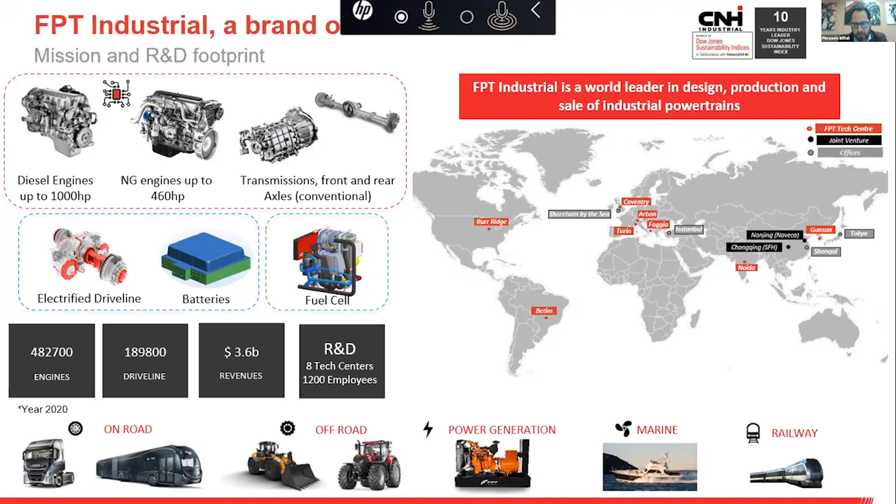So why electrification? For the on-road segment, electrification is a must to achieve zero emission, lowering CO2 to comply with the tightening legislation framework coming with Euro 6, Euro 7, and worldwide certification regulation. For the agricultural segment, we see more room to use electrification as an enabler to electrically assist the machine, the engine, to improve overall machine productivity and fuel economy.

Our concept of hybrid tractors consists of a downsized combustion engine, multi-fuel, so the engine can run either on diesel or natural gas, with an integrated electrified machine coupled with the compact engine, to replace the original conventional unit on the machine. This also can bring simplification of the after-treatment, and coupled with electrification of auxiliaries and implements, can offer great benefit in terms of fuel economy.

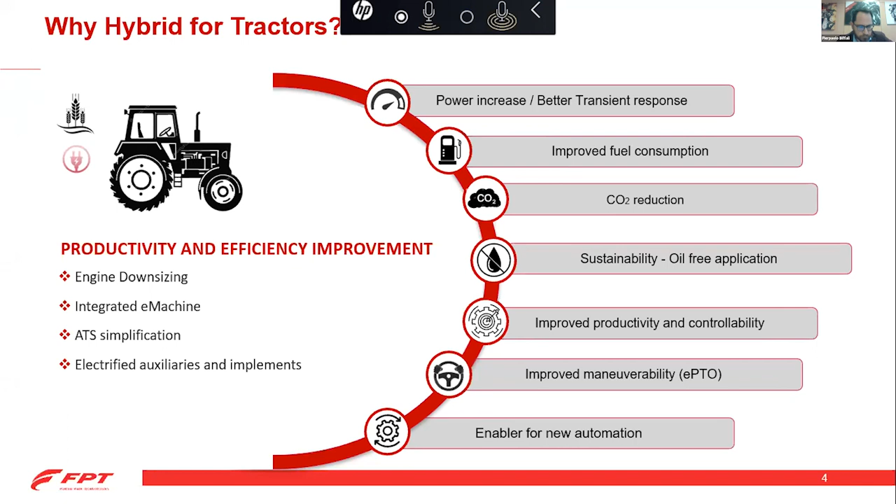The heart of the tractor, of the hybrid solution, is our F28 hybrid. It's a 4-cylinder inline newborn engine, 2.8 liter displacement, coupled with an integrated motor generator on the flywheel side, conceived to be scalable. That means operating at 48 volts for a mild hybrid architecture, but with the same compact layout, scalable to a high voltage solution, offering zero emission operation opportunity and very low noise output when the electrical mode is activated.

The F28 engine can run either on diesel or methane or biomethane for agricultural application. We can also leverage a simplified after treatment architecture, saving the SCR. That means no urea, reduced complexity of the after treatment, and improved reliability of the system on the field.

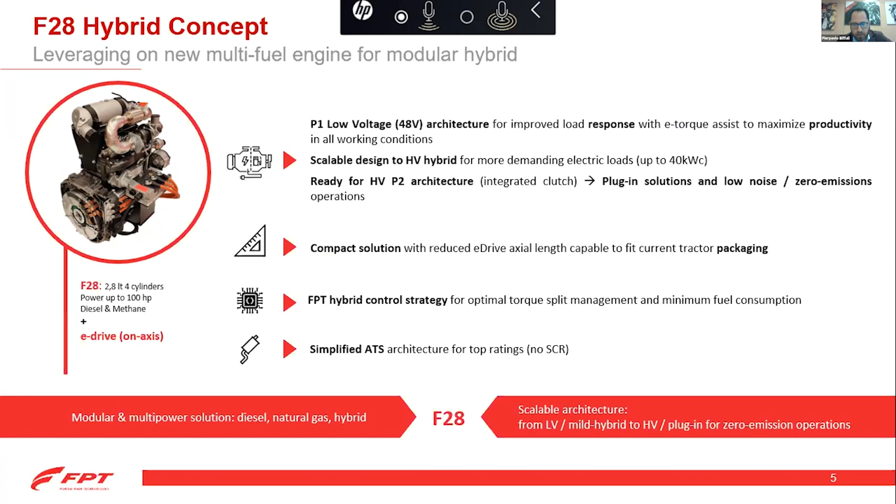What maturity have we achieved, where are we today? We have already run testing on the powertrain test bench with the hybrid unit, reproducing several duty cycles and mission operations of the tractor, confirming the performance increase and the big step in fuel economy when this hybrid machine is coupled with 48 volt electrified implements like a leaf stripper, disc harrow, or sprayer pumps, which can provide very efficient operation compared to current mechanical and hydraulic implements.

We have planned next year, in 2022, to run field trials on a small fleet of tractors for this 48 volt arrangement, and we will go ahead with the high voltage solution first on the test bench and on the dyno, and then the following year on the field.

The main challenges behind concrete application of such technology in tractors are two. One, as you can imagine, is still the high cost of hybridization and electrification of the tractor, which is slowing down the introduction of electrified solutions in agriculture. But this can be partially or even totally compensated and recovered by improved features, starting from fuel economy and fuel expense that such an arrangement can offer.

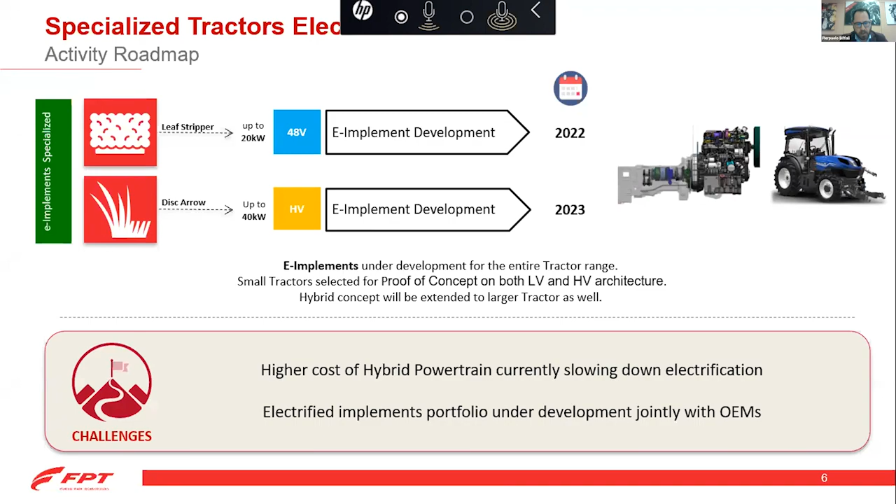And I'm done, Julian. Thank you very much.

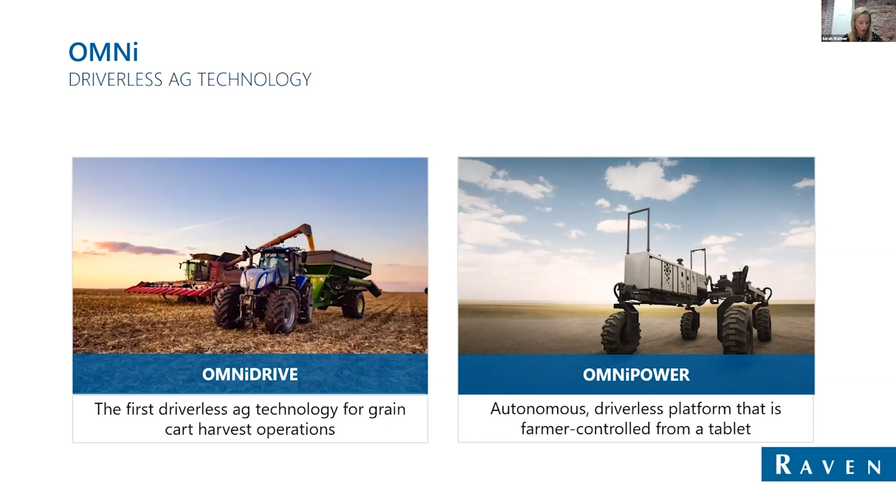The next one I want to touch on briefly, because I want to make sure people understand from our perspective, is connected workflow. As we push towards more automated or autonomous solutions, the connectivity of what job needs to be done and what data that machine is picking up as it goes through the field becomes incredibly important. Even today, where for the vast majority everything's manned, as work gets more complicated, as farms get larger, the coordination of machines, people, and activity, and the understanding of what happened in that field for your own planning purposes and for regulatory purposes, all of that becomes more and more critical.

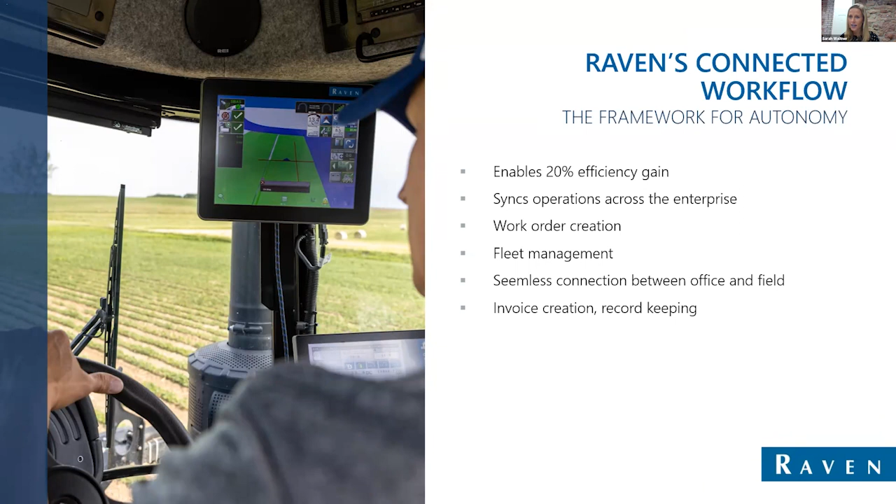As part of our solution set, we have what's called connected workflow. It's all about making sure that the work and the jobs you send to the field are the correct ones, that in large fleets you understand where your fleet is, how you can maximize the usage of your fleet, your people, your material, and then making sure you're getting all of that back from the field for further decisions, invoicing if appropriate, regulatory needs, and other things. That to us is a key piece as we look towards automation and autonomy, because you have to have that connection via data and information on what is going on there.

My encouragement, just to wrap up here: ag continues to be changing, technology continues to get more complicated, farming professionals already work tremendously hard, and for us to continue to feed the world, we need to continue to insert technology where it makes sense. My challenge to people would be to think about what the future of automation and/or autonomy looks like in your operation, and what things you should be thinking about now and planning for over the next 1, 3, and 5 years.

I think the gentleman who shared on the evolution of engines did a great job. It's not all going to come at once, same size, same thing for everybody. This is going to come in some markets and use cases faster than others, but I think it will come in some way for everyone. So being ready for that, given all the changing dynamics we see in front of us, will be really important. Thank you.

Come on, there we go. Hello, Sarah, that was great. That OmniPower thing is fantastic looking, it looks like something that should be on Mars, right?

It's really exciting, fun to watch in motion too. I imagine it's quite cool, just trundling around by itself. Is there any link between autonomous and artificial intelligence? It seems like the two things would go hand in hand.

First, with a proven diesel engine, almost all drive-related challenges in agriculture could be solved. Thanks to high torques and low speeds, the units also run very economically, and the fuel tanks are big enough for longer working days.

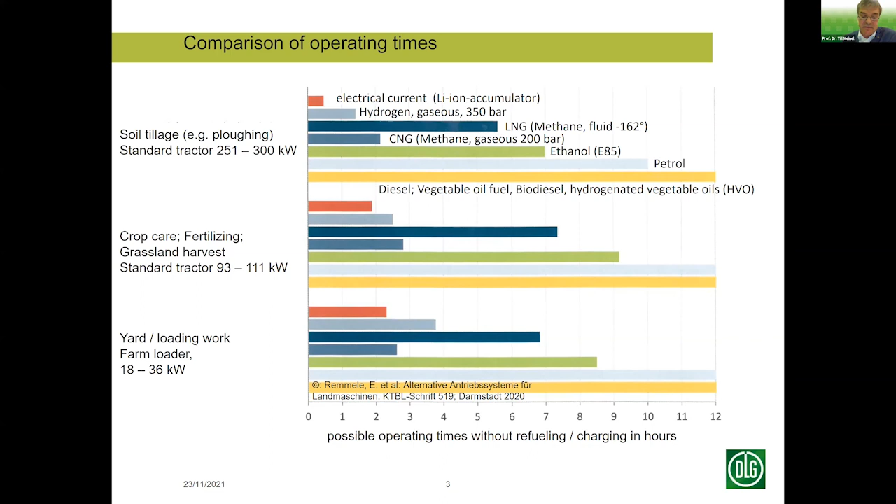In the heavy truck business, three concepts are in the foreground of discussion at the moment: battery electric drives, combustion engines for gaseous fuels, and fuel cell drives. Some of those concepts are already realized for ag machines, and have been in the market for many years.

Here we see an example for a battery electric driven implement. Farm loaders, for instance from the company Weidemann, are sold since 2015, followed by other companies, for instance Schaeffer, and also the e-truck from Silo King.

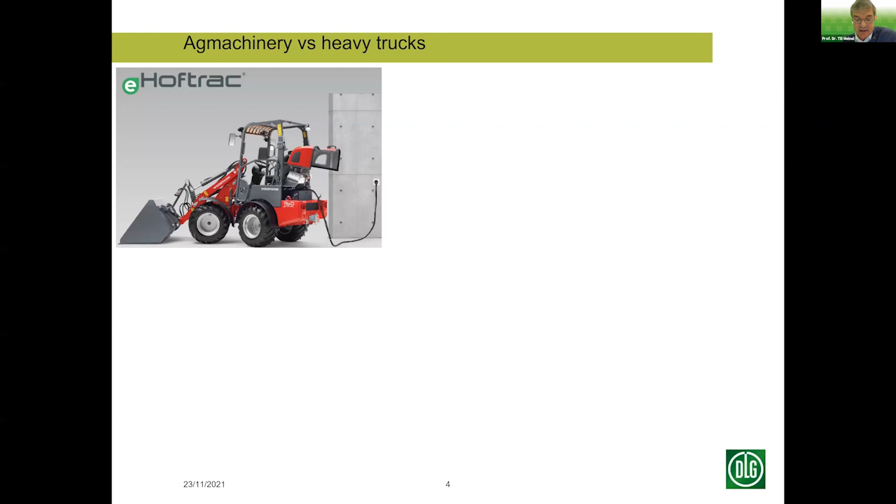The second concept is combustion engines for gaseous fuels. Here, New Holland with this T6 180 methane is starting right now the series production — this is an engine for CNG. We also have other examples, for instance the dual fuel motor for diesel and CNG from Valtra, and also FPT, as we heard earlier today, will come with such a product.

The third concept is combustion engines for hydrogen. Here, JCB with the backhoe loader with hydrogen-powered combustion engines is shown, and also Deutz is planning a series production of a 7.8 liter hydrogen motor in 2024. But these motors are not for applications in mobile machines so far.

Fuel cell drives are not realistic for ag machines at the moment. There are some research projects going on, but that will not be brought to the market within short term.

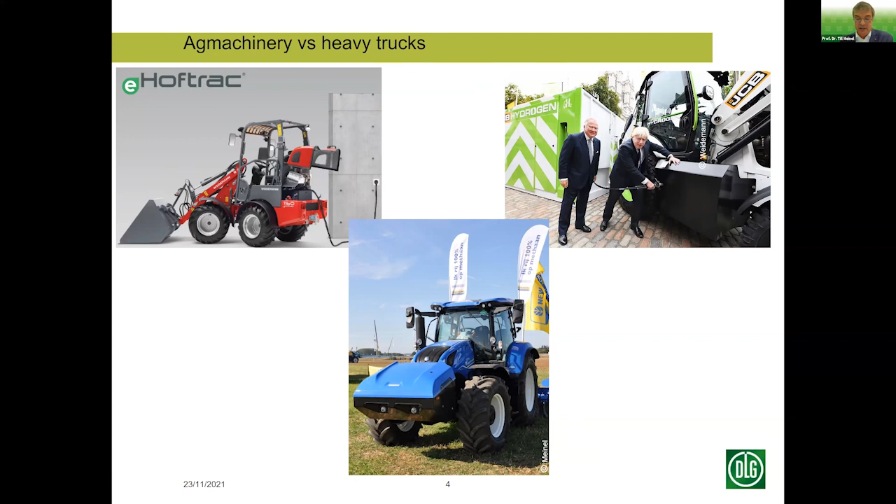The challenges are always the integration of new drive systems into the vehicle concept, and also, from the farmer's point of view, the construction of additional infrastructure for energy supply, like electricity, hydrogen, or methane.

Which alternative energy sources for diesel are to be seen for ag machines?

Especially with high performance agricultural machines, such as combine harvesters, forage harvesters, or large tractors, a general move away from internal combustion engines in the next 10 to 20 years does not seem realistic, and also makes no sense. If, for example, vegetable oil is used as fuel instead of diesel, carbon dioxide emissions can be significantly reduced, and this is especially true for decentralized production in small cycles.

With all those fuels, it is possible to go on with classic combustion engines, or ones which are partly modified. Vegetable oil fuel works also with stage 5 engines, including exhaust after-treatment systems. A project run by John Deere, the Bavarian Technology Center in Straubing, and the Technical University Kaiserslautern has shown this very clearly.

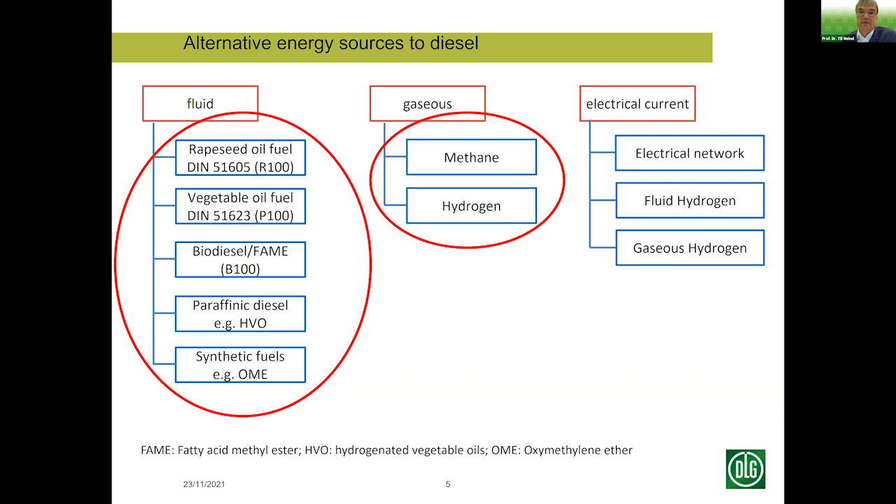What I wanted to ask first off, we're looking at this kind of fracturing of the market right now in terms of different fuel types. Some of them are a bit out there. How, in your experience, is the agricultural market open to new technologies like this? Because some of them push the boundary a little bit.

Yeah, the ag market is very sensitive to prices, to fuel prices. If you look back in 2007, 2008, we had the hype of biodiesel use in Germany, and this has, of course, mainly a financial aspect. So the technology is there—engines for biodiesel and vegetable oil. It is proven, it works. But the financial aspect is not safe enough for the farmers to invest at the moment. So that is, from my experience, the biggest point and the biggest obstacle to bringing those technologies into the market.

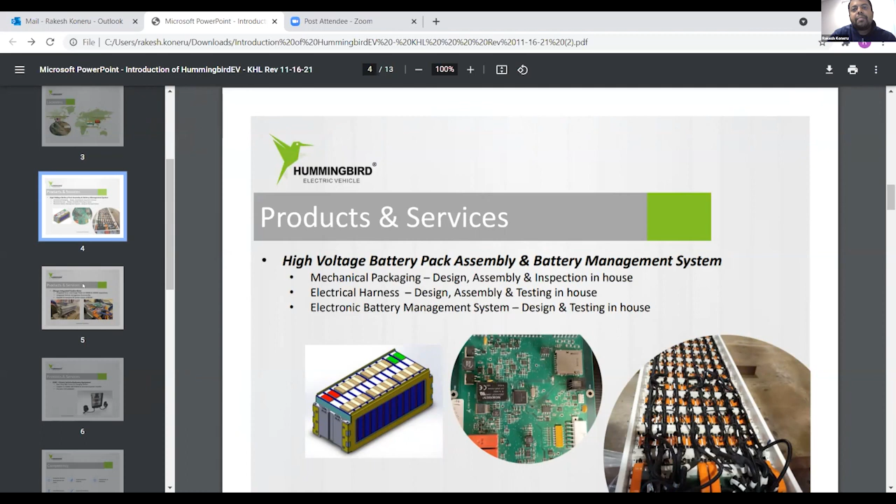We're also unique in that we have a smart drive system which enables multi-platform use. What it means is we have a software-driven system. Whether the vehicle is an ag tractor or a Class 8 truck, we use the same powertrain system with just the software configuration for multi-use, which can reduce the cost over a period of time for the end user.

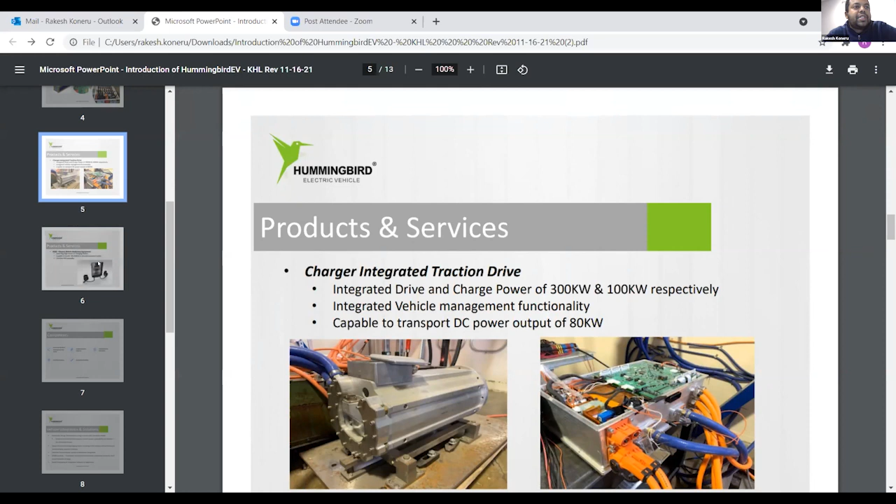Our technology is also a little bit unique in the sense that we have a unique powertrain system which will enable the driver, a user, to drive and charge using the same power electronics. So what it enables is, at no added cost to the consumer, we can do fast onboard AC charging rather than needing an expensive DC fast charger. That's all done with our unique powertrain system, which is inbuilt into the vehicle platform itself. And with that, we had to go and develop our own type 2 AC level charging station, which is capable of handling about 150 kilowatts of charging.

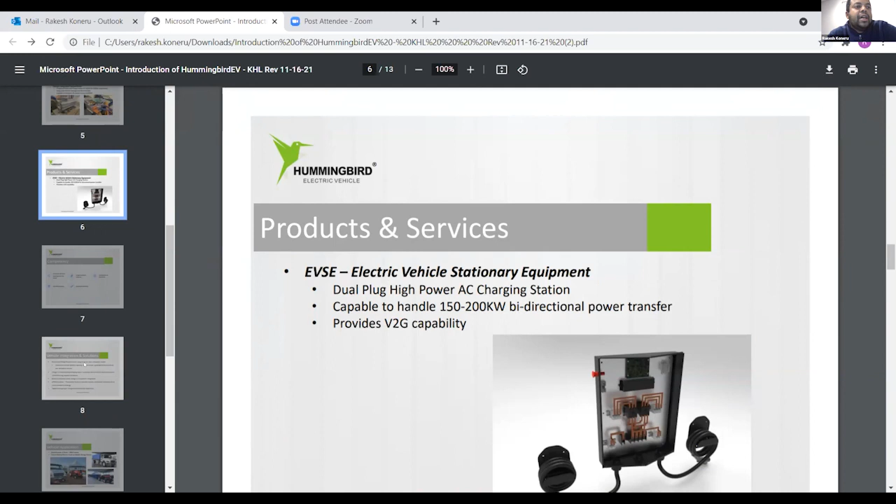Now, specific to this conversation, to the ag space, our approach has been a little bit different. Being in the startup environment, we've started to look at the evolution of EVs in different industries across the globe. One of the industries that was not much focused on in trying to reduce emissions so far, we feel, is on the ag side. And agriculture plays a key role, about 30% of land in the world is used for agriculture. Most of the emissions, as the professor earlier mentioned, contribute quite a bit from the farming side, and there's not many solutions out there.

You'll either see an OEM coming up with an ag tractor, or you'll have companies more focused on the infrastructure, but the handshaking between these two technologies is left to the user, and that can be very challenging, especially when you get to a farmer who doesn't care what vehicle he uses or what vehicle he drives. It's all about cost and the reliability of it. So we've understood the complexity of the farming.

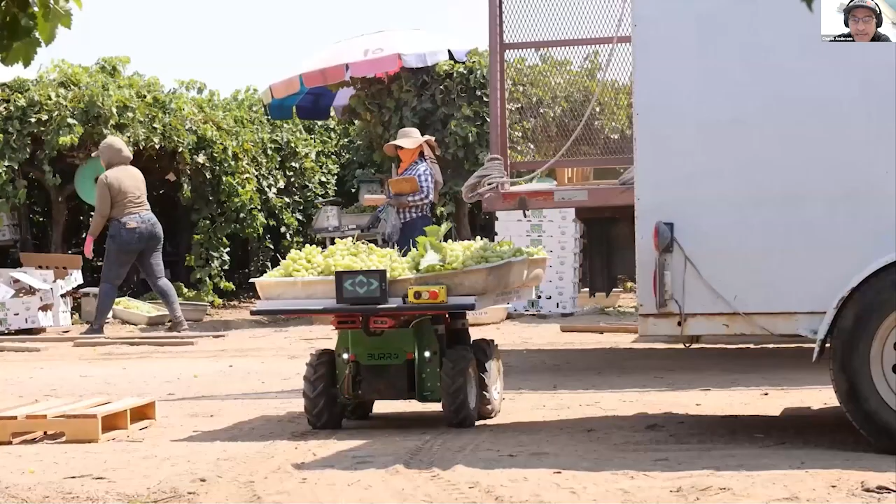So these are Burros, the product you see on the screen. These are little computer vision-based autonomous platforms that carry heavy things in hand harvesting operations, in areas where you've got people running around in the field doing various tasks. And what's really, really key to this approach is our use of computer vision as the dominant sensor modality.

Computer vision has a couple of very important attributes. One, it's actually pretty low cost, so we're basically using cell phone cameras to navigate. Two, we're able to navigate under canopies, so we're able to go into areas where you don't have GPS or can't see the sky reliably. And those areas tend to be the areas where people work.

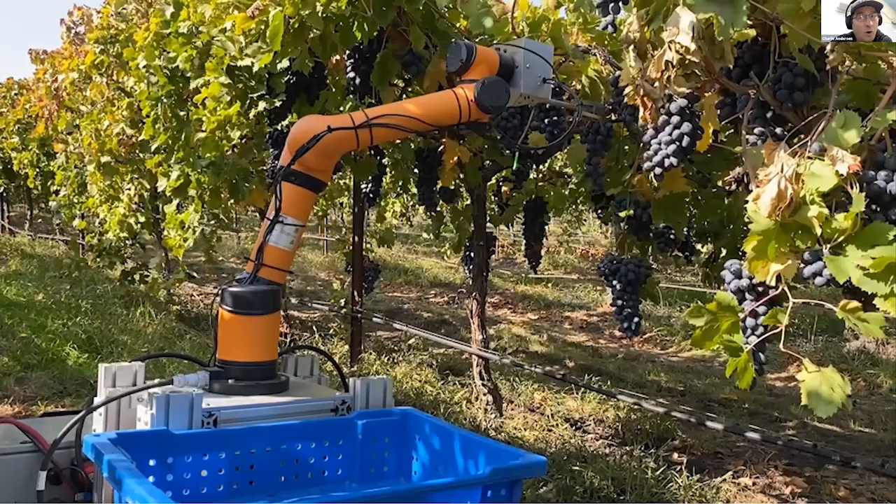And then the third attribute of vision is that the more you run, the more you learn. Each one of these platforms processes about 2 terabytes of imagery per hour of runtime. That imagery can be used to do things like tell you how many clusters of grapes there are on a vine, ultimately to do things like autonomous picking.

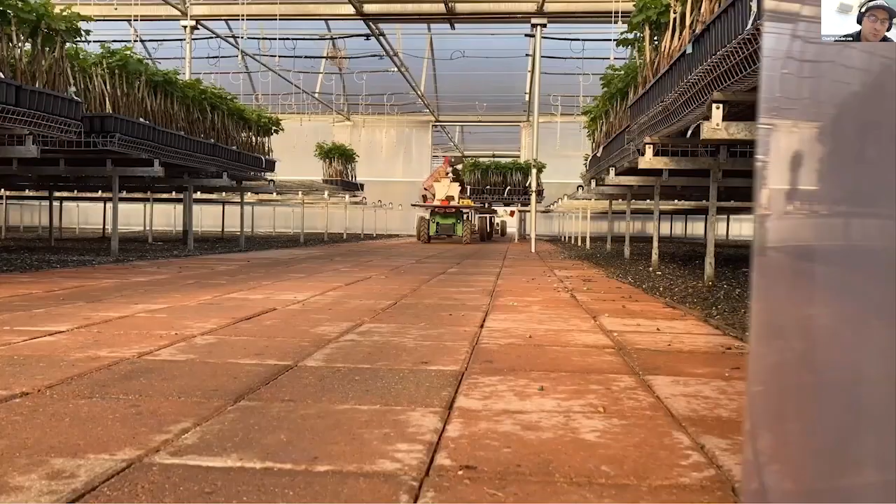And the more we run, the more we have what is effectively a sponge-like or learning platform that is learning about the environments where people work, and to which we can add more and more capability over time.

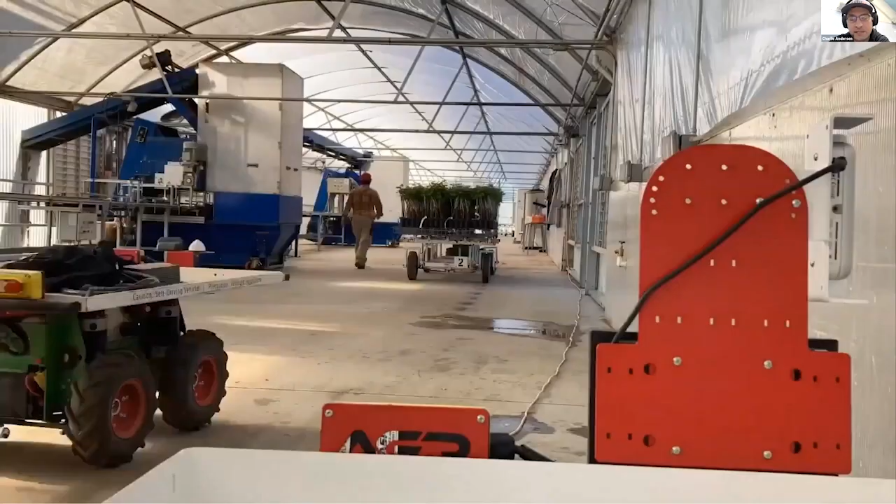And then beyond that, on the mobility side, as we are putting these things out into the world, we keep having customers come up with other kind of funky use cases that we never would have dreamed of as they're thinking about new ways of using the product. So people are putting them into a whole host of different applications, both daytime and nighttime, that are increasingly interesting for a variety of different reasons.

And so to us, I think people are very, very good at predicting where the world is going over the next 15 to 20 years. And I think in the next 15 to 20 years, we know that you're going to have robots running around doing a whole host of different tasks within agriculture. But what people really struggle to do is to predict how to win in years 1 through 5.

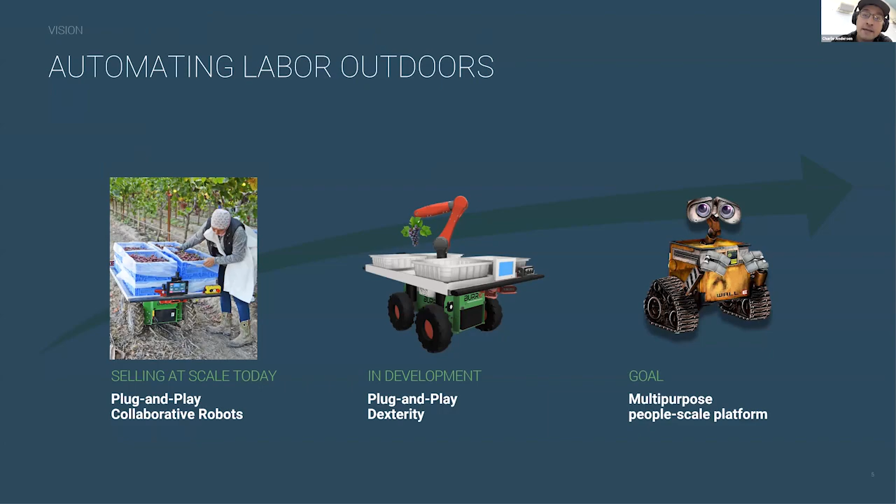And to us, if you imagine small robots akin to Disney's WALL-E or R2-D2 running around, perceiving the world, perceiving stuff within the world and then manipulating things, the way that actually begins is likely with a collaborative vision-based platform that works alongside people and that learns to do more and more things over time, ultimately ending in that kind of 15 or 20 year from now end goal, which again is small robots running around doing the stuff that people do today. And so with that, the autonomy we have today is encapsulated on this slide.

We have an approach that we've developed that we call pop-up autonomy, which we have patented, or at least is patent pending globally. And with that approach, the robots each behave as an individual actor and can be operated out of the box without any infrastructure needing to be installed.

And so if you're a user, you grab one of these things, unload it from a trailer or from some point, have it follow you to where you're going to use it, and then you can train it over relatively short routes. Those routes can be extended if they're structured in environments like roads or rows, and the robots are therefore able to learn very quickly how to run autonomous routes in a variety of environments.

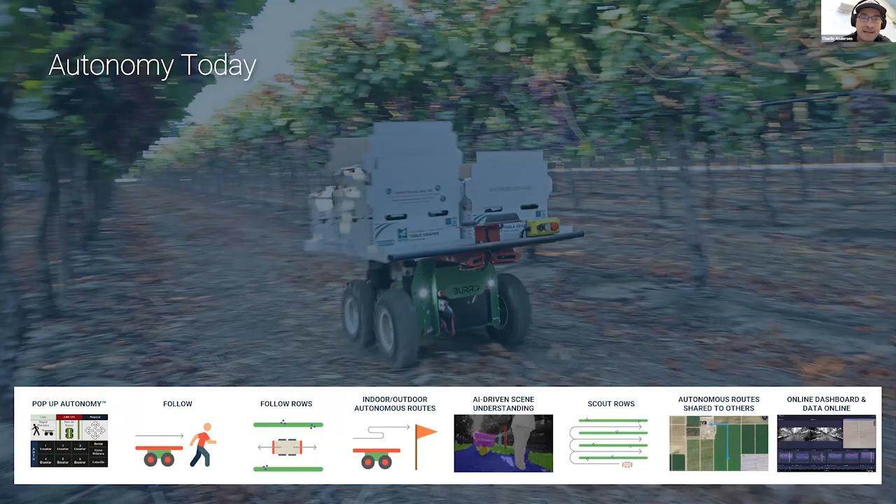And separately, every single unit is online and all units share data between other units. And what that means is that if you have one robot in an environment with a bunch of other ones, you can train one unit to a vineyard or to a route and quickly have all of the other robots on site know that route. And so you've got this kind of natural swarming impact that can create a lot of really, really exciting possible use cases.

With that said, the initial use case that we're primarily doing today is within table grape and blueberry and other berry production, where the robots are trained over a relatively short route, and then they are running that short route, including a row, all day long with a bunch of people using an asset. And with this type of mobility autonomy, you can deliver something like a 2 to 3 month ROI with a product out of the box that's also the basis for more autonomy over time.

And so with this as kind of foundational stuff for the product, to us, what's really exciting about this is that it's a people scale platform. So we're competing with a person doing work. We're not really competing with a big tractor because those don't really exist as tools within our existing use cases.

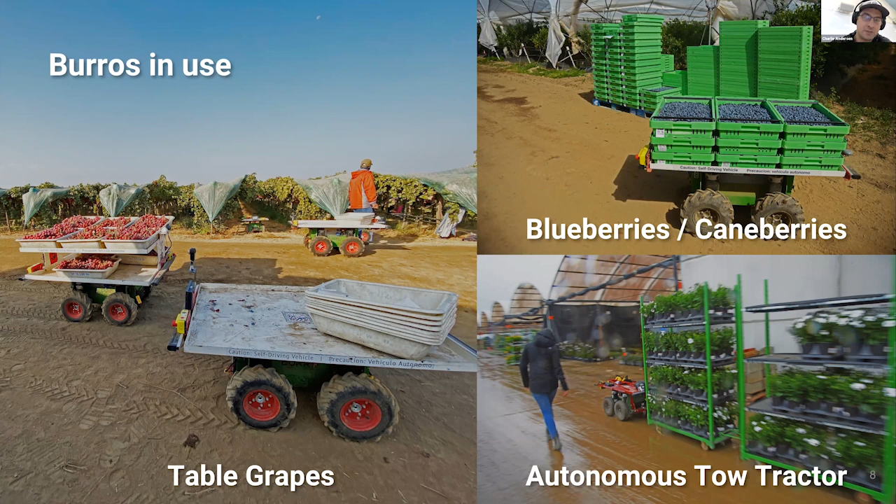And if you're a people scale platform that can work alongside people, you can go into table grape production and blueberries and blackberries and raspberries and nursery crops and persimmons and other stone fruit and solar panel operations. There are a whole host of use cases where you've got people running around doing a variety of tasks. And then beyond that, we keep encountering additional use cases.

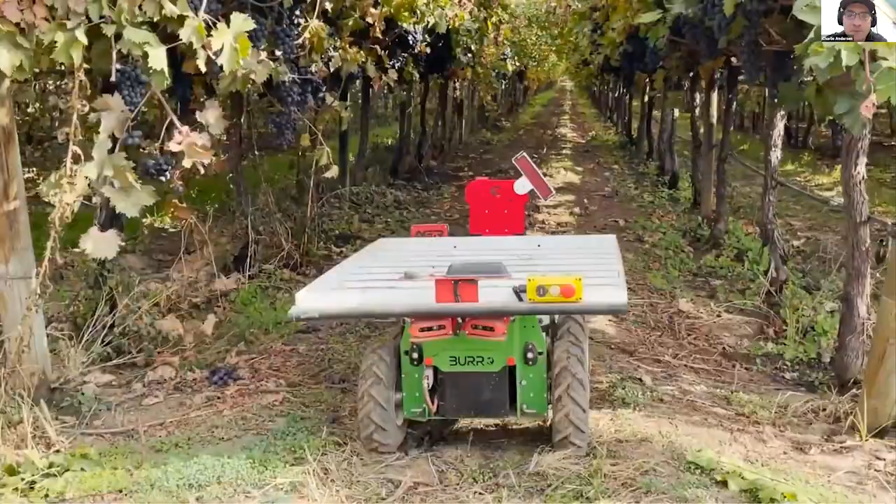And so here you're seeing a crop scouting type of utility we've developed, where in a traditional world, you'd have a guy who drives into a block, looks at a couple of vines, and on the basis of scouting 2 or 3 vines, makes a decision on 1,600 acres. In our case, with our robots, you can send them up and down rows autonomously, counting the clusters of grapes on every single vine. And I think there are a whole host of tasks where people walk up and down through environments, look at stuff around them, and then count or scout, that something like this product can do.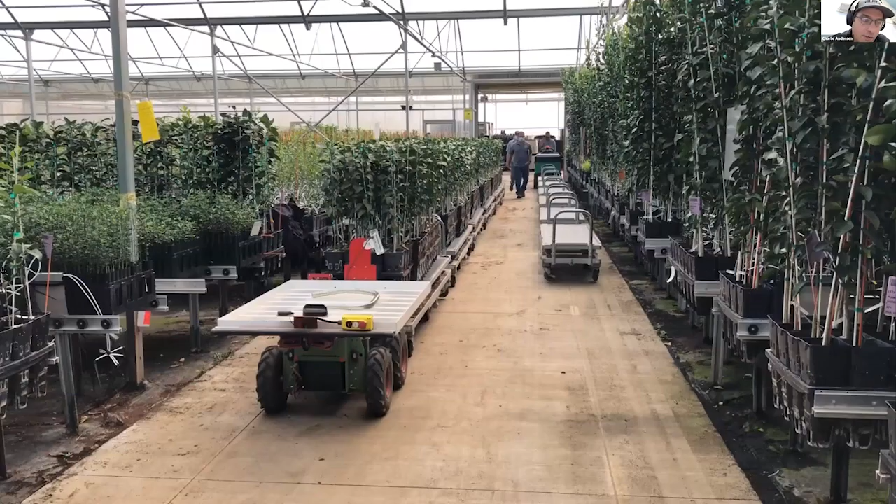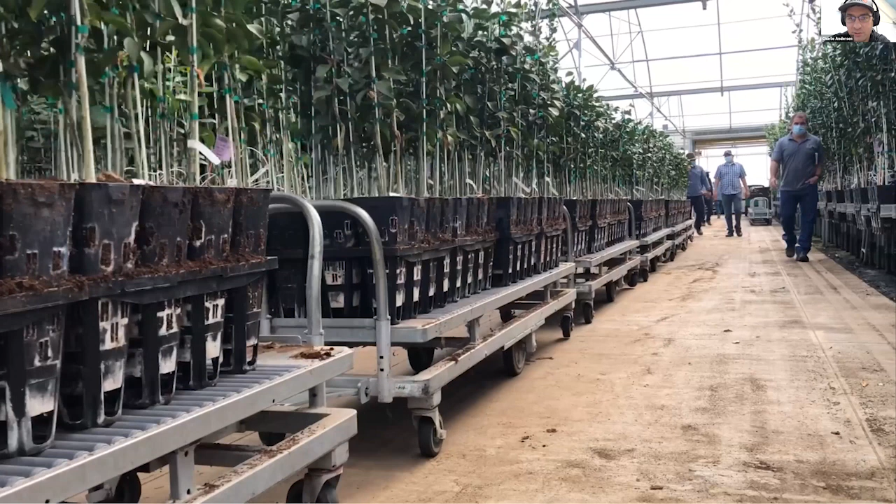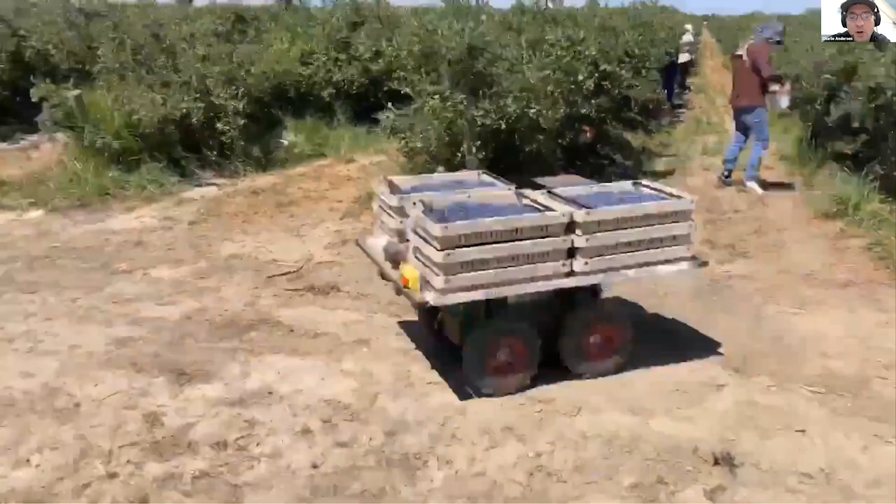Beyond that, we're also seeing them used in nursery operations to tow trailers. The appeal of this use case is that you can set a machine up quickly without having to install tape, an induction line, or anything else on the ground, which is what a lot of existing stuff would otherwise require. So relatively rapidly, you can have an infrastructure-free autonomous towing platform in a whole host of different nursery type settings. We're also seeing them used in a lot of other berry type operations, et cetera.

So there are a whole host of different use cases where you have people running around in indoor, outdoor settings, under a canopy or out in the open, that can utilize a product like this at some level. What is key to our platform working is this approach to autonomy that learns continuously and can navigate and localize under a canopy in areas where you couldn't operate with GPS.

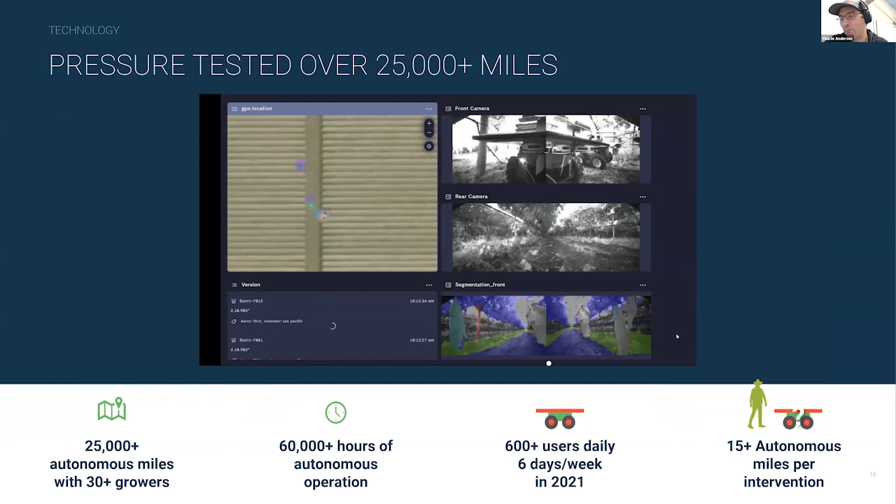And all of that is packaged into something anybody can operate. We typically have about 500 to 600 people operating them a day right now, so they're very widely operated, and they've also been pressure tested over about one drive around the world — we've done about 25,000 autonomous miles at this point. Our autonomy, over those hours of operation, has reached about 15 autonomous miles per intervention, and that number continues to rise. So we are selling something that drives itself in an increasingly reliable format.

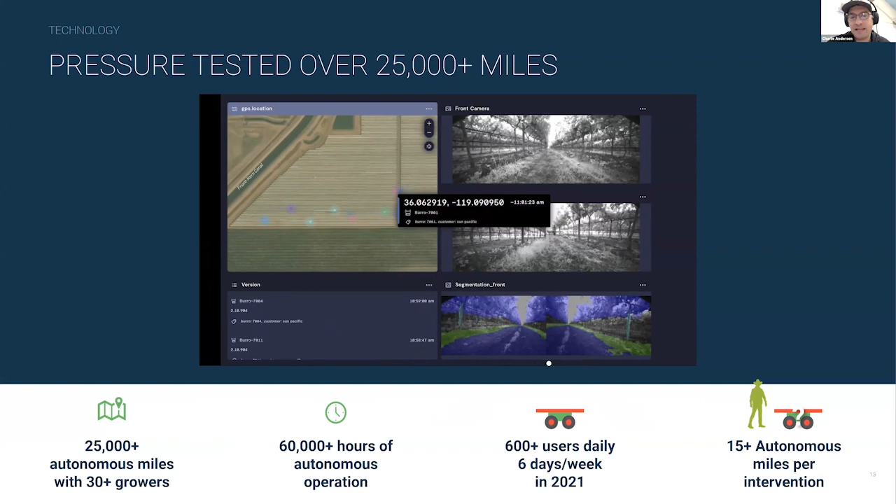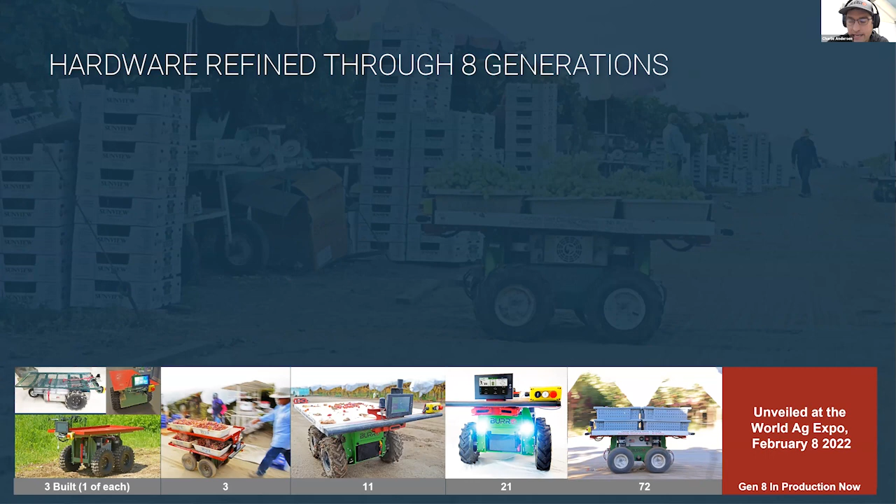On the hardware side, we've now been through about 8 generations of hardware. We have about 95 or so units running daily right now in paid commercial use, and we're going to be unveiling our 8th generation machine at the World Ag Expo coming up early in the spring. Our Gen 8 machines are actually in production now and can be ordered today for April or May delivery, assuming the global supply chain maintains at least its current progression and doesn't get worse.

So with this as kind of scoping, when you think about the future and where autonomy is going, to us there's this opportunity to build people scale robots, not machine scale, that are doing things that people do. And those use cases are not immediately obvious to everybody. So we have chosen initially a couple of specific use cases around mobility, or adding in data and dexterity, and also branching out into a couple of different adjacencies.

I think if we look at the world 10 or 20 years from now, you're going to have small robots like these running around doing a whole host of different tasks, and I think that's really, to me, very, very exciting for a whole host of different reasons. So with that, we are Burro. I think we are building a people scale collaborative robot that is really the basis for a lot more autonomy in a lot of these different areas.

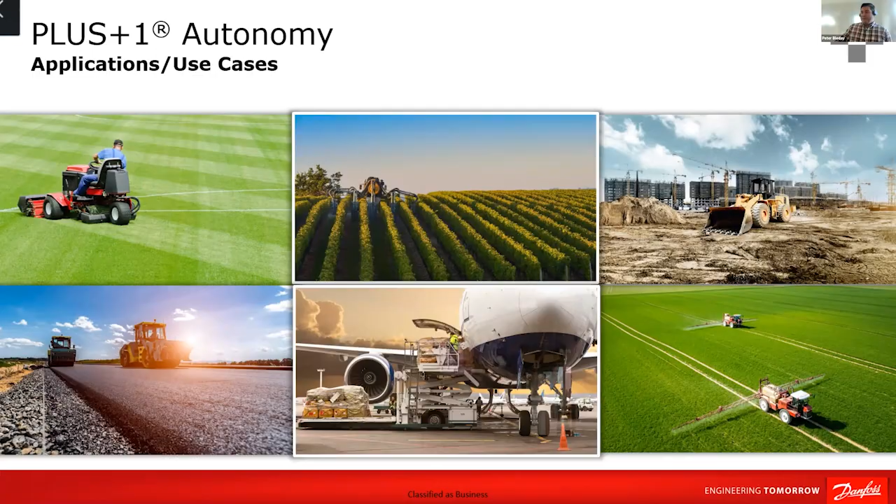With that, the question is really around what does Danfoss do, and what do we provide? For those that are familiar with Danfoss, a lot of people know us as a hydraulic supplier, or sometimes the thermostat that's on in your house in mostly European countries.

When we talk about autonomous vehicles, we really do 3 different things that are needed across all vehicles to start to solve some of these problems and add some of these functions in. The first one is the hardware. As you start to talk about more and more complex operations on a vehicle, you need higher processing power. You need sensors and perception around you. And while we don't build those sensors ourselves, we really focus on the partnerships around those sensors and the ease of integration for those sensors to help drive these functions.

But also we need the basic hardware, like a steering system, to be electrified, to be able to start to take in more and more of the software commands, as opposed to pilot hydraulic or other commands.

When we move to the software, where Danfoss focuses is really around building software tools, through our PLUS+1 platform that any OEM or any user can pick up and quickly build the basics of an autonomous vehicle. There are some functions like path following, perception, and obstacle detection, obstacle avoidance that are absolutely going to be required for almost every vehicle across every industry.

By building up those basic functions that are going to be critical, what we allow is the OEM to then focus on that last 20% of the vehicle. And that last 20% is unique. It's the unique function that that vehicle does, that that OEM provides to its customers.

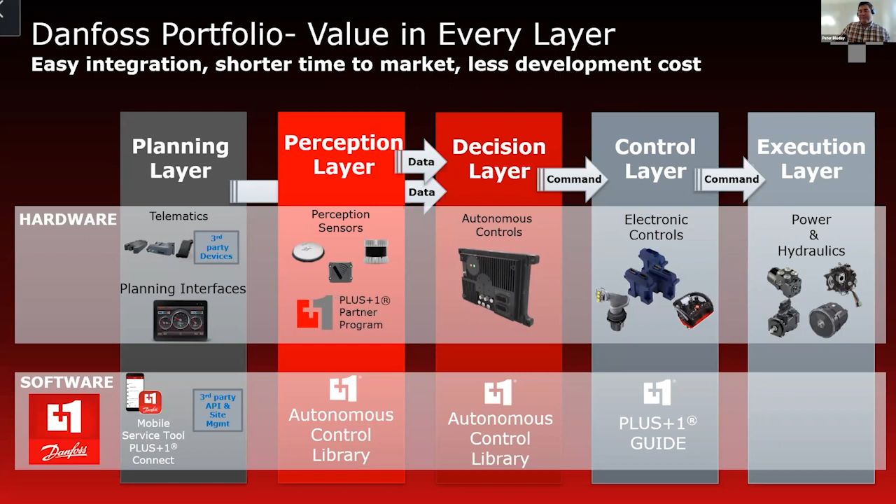So the ease of integration between those things and the understanding there is kind of critical to Danfoss's journey and what we can provide OEMs in the agriculture market to, again, increase their safety, productivity, and precision of their vehicles. With that, that is all I have, Julian.

Peter, thank you so much. Hey, I'll tell you what, just to kick off, I have a Danfoss thermostat in my house, so I knew the name a long time ago.

Just a couple of quick questions, if I may, I think it'll be interesting to a lot of people watching. Once you've decided to implement an autonomous system from Danfoss Power Solutions, how long does it take before you're actually up and running? It depends on the use case and what level of autonomy you're pushing toward - no human intervention versus operator assistance.

But really, those basic tools save about 50% of the development time, including a lot of the integration with sensors and other third-party things to bring it all together quickly. That saves time for tuning your vehicle - the steering, the exact use case, and the functions it needs. So it depends a lot on the actual use case, but we're shooting for almost a 50 to 60% reduction as we build up our platform.